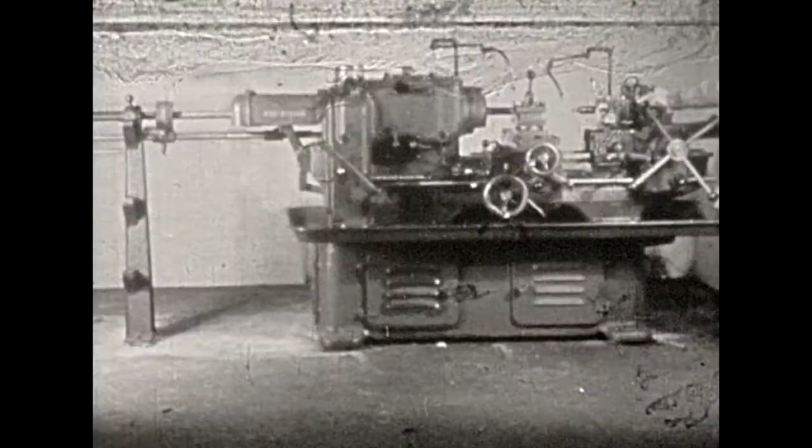The turret lathe is used when the same series of lathe operations is required to produce identical pieces. In the hexagon turret, 6 different tools can be mounted and used one after the other. Additional tools can be mounted on the cross slide. With this arrangement, any number of identical workpieces can be put through the same series of operations.

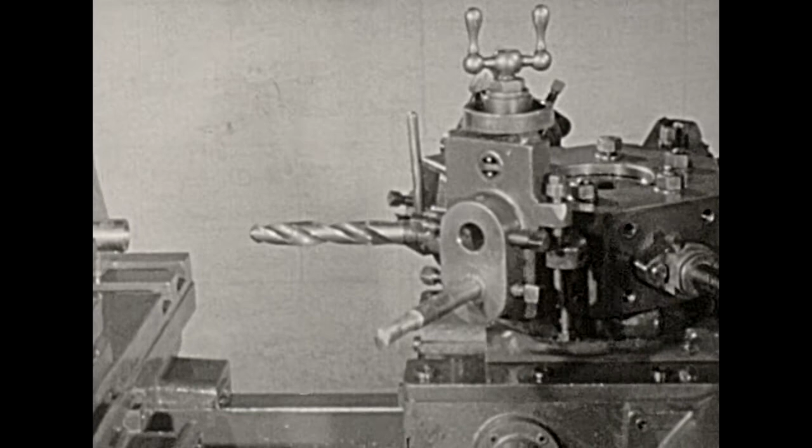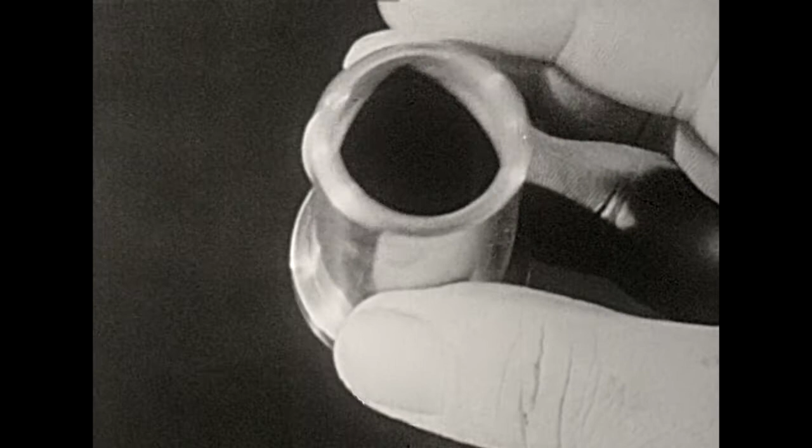This typical turret lathe job requires 10 individual operations to produce finished pieces from 1 1/2 inch bar stock. All the operations are made with one setup. The job to be done, the tools to be used, and their order are specified as follows.

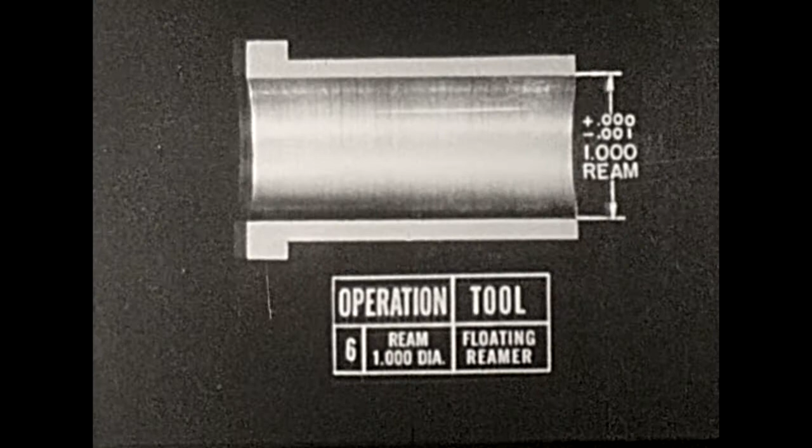The first of 6 operations with the hexagon turret, combination stop and center drill. 2, chamfer with a chamfer tool. 3, machine the outside diameter with a box tool. 4, drill a 31/32 hole. 5, bore to .994 diameter using a sliding tool holder. 6, ream to 1 inch diameter with a floating reamer.

On the cross slide, undercut with a grooving tool. Face and chamfer with a facing tool. Break corners with a file. Cut off with parting tool.

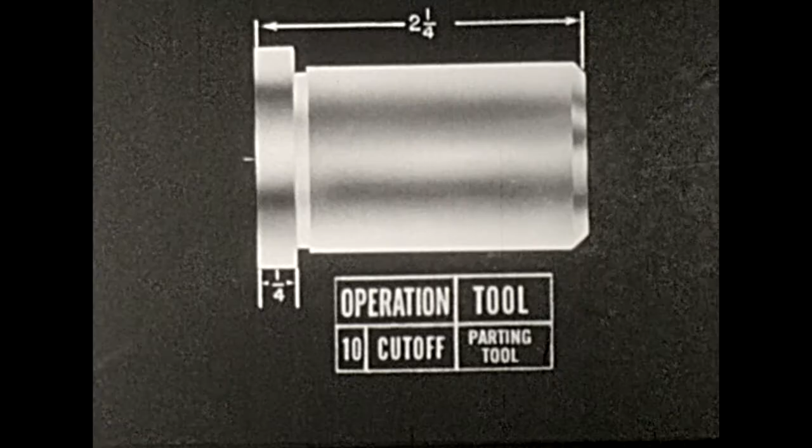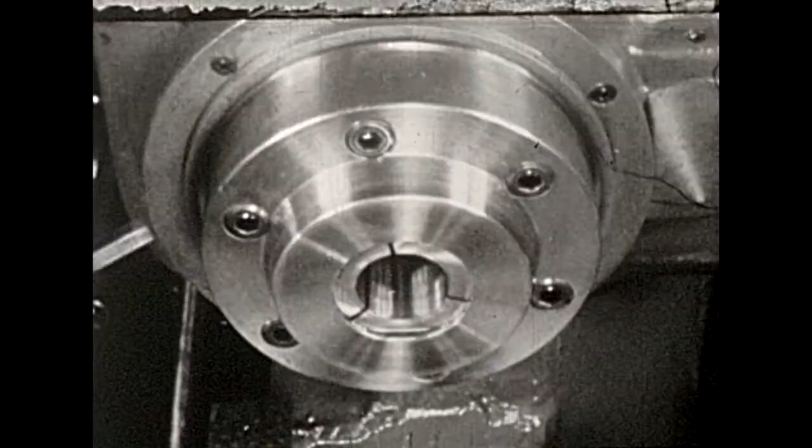To set up the machine to handle 1 1/2 bar stock, first remove the nose guard. Then the nose piece. The nose piece is removed so that the collet may be taken out and replaced by one for this particular job. Loosen the collet by tapping it with a lead hammer.

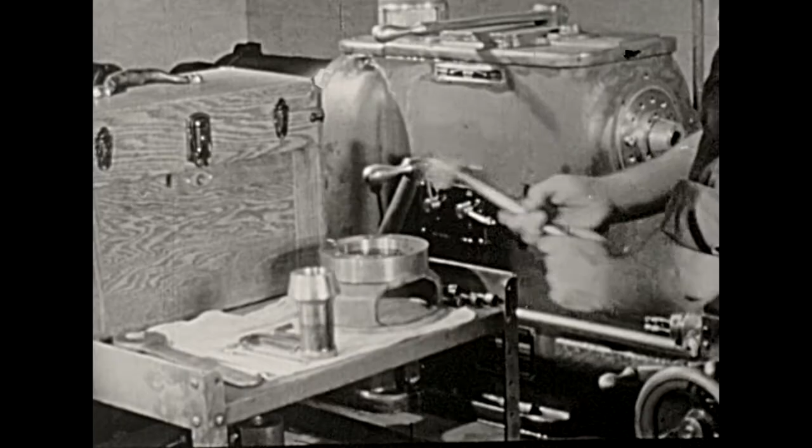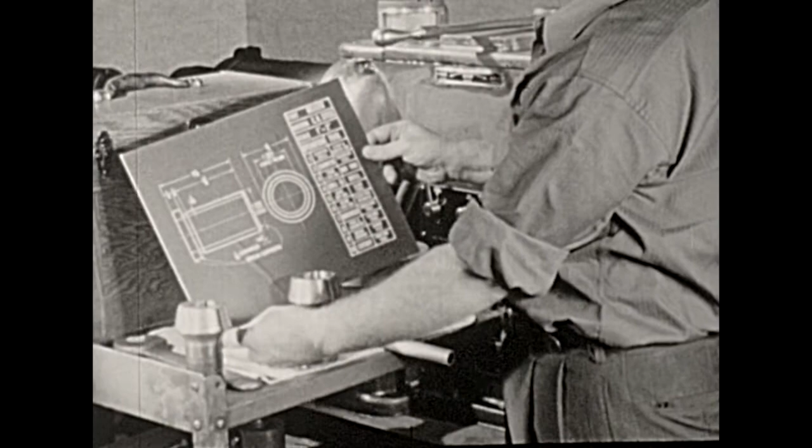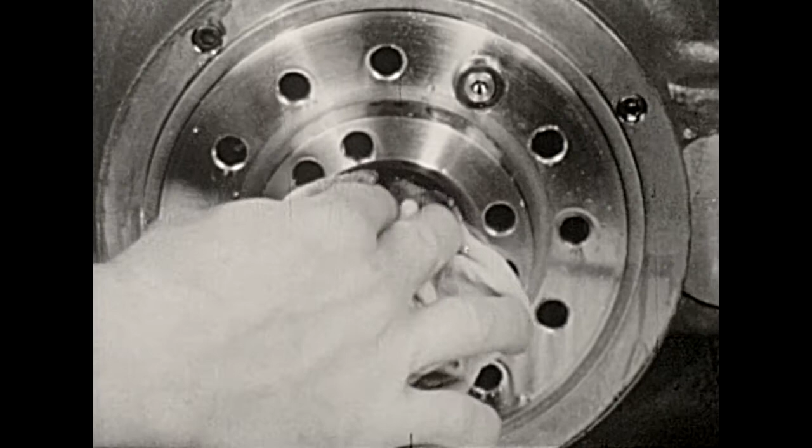The blueprint specifies the collet to be used. In this case, 1 1/2 inches. Before installing the new collet, be sure that the face of the spindle and other surfaces are wiped clean. Wipe the collet chuck. Place it on the spindle.

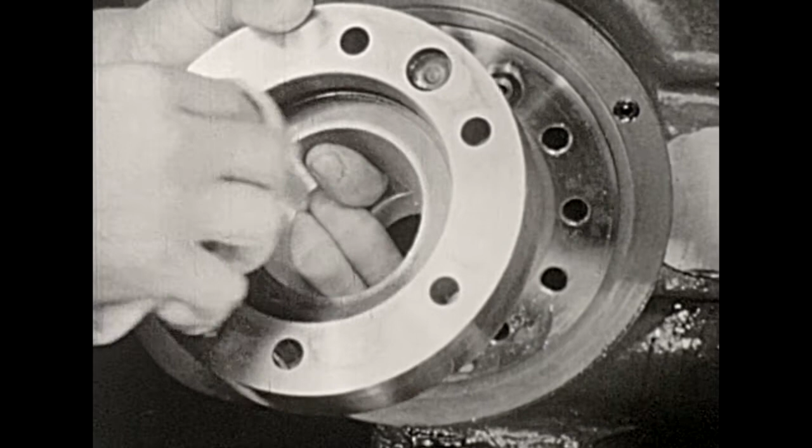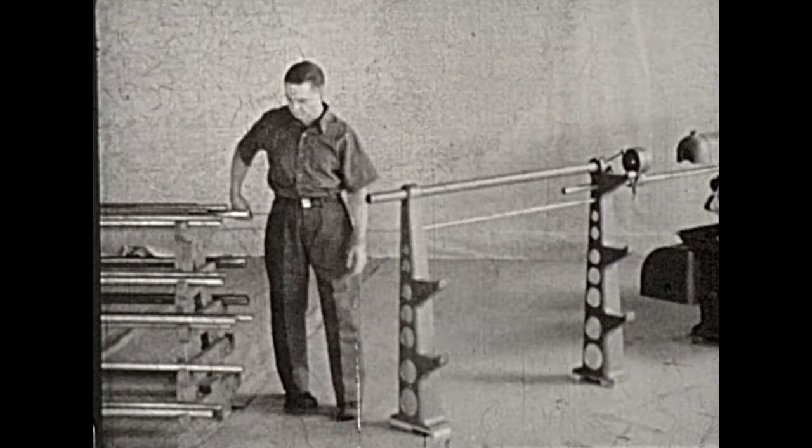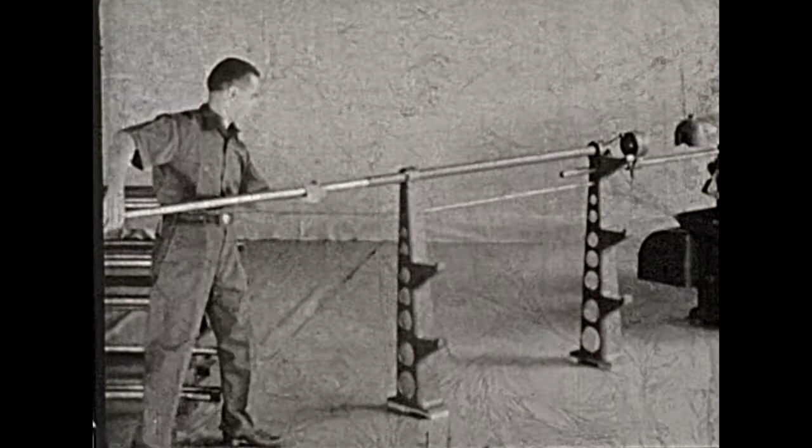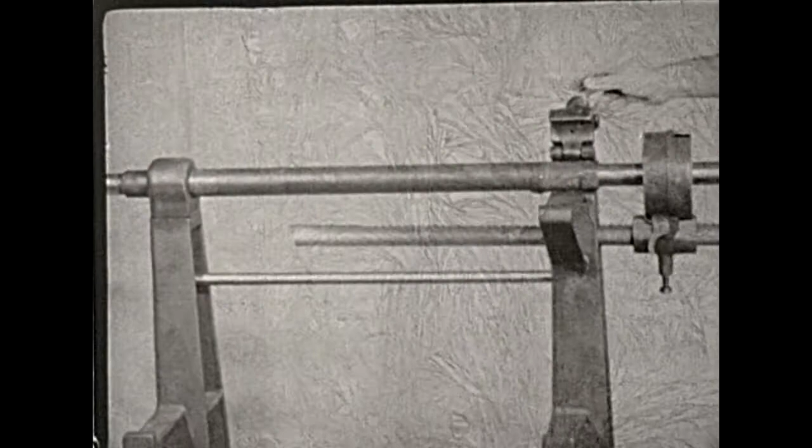Now reassemble the nose piece and nose guard. Select a bar of 1 1/2 inch cold rolled steel. Be sure to check it for size. Insert the rod into the safety tube at the rear of the machine. Push it through until it enters the spindle. Close and lock the clamp on the stock stand.

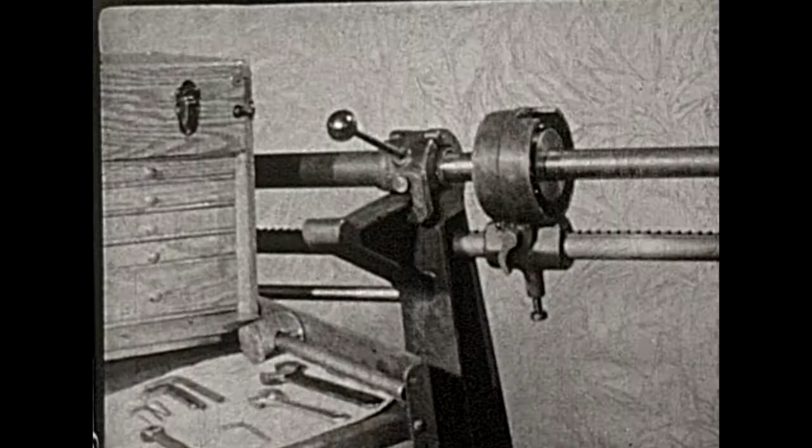Stock is fed into the machine by means of this feed collar and ratchet. Be sure that the set screws on the collar are tight. Also the lock nuts. The feed collar is operated by the bar stock feed lever. The forward stroke feeds the stock through the machine. In the rear position, the fingers are spread. This tightens the collet and clamps the stock in the spindle.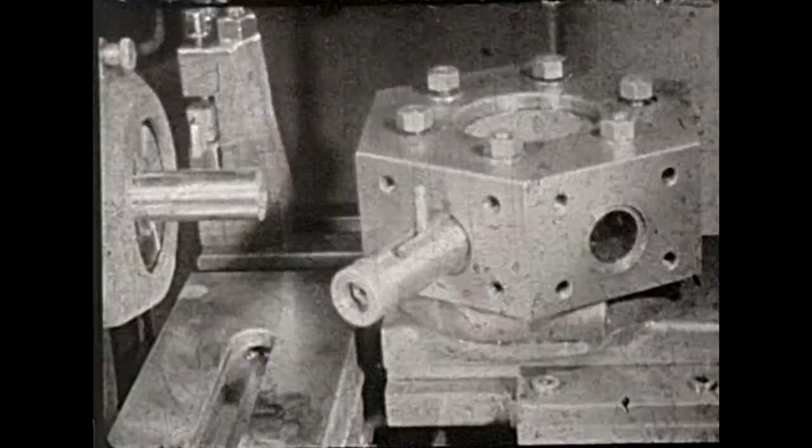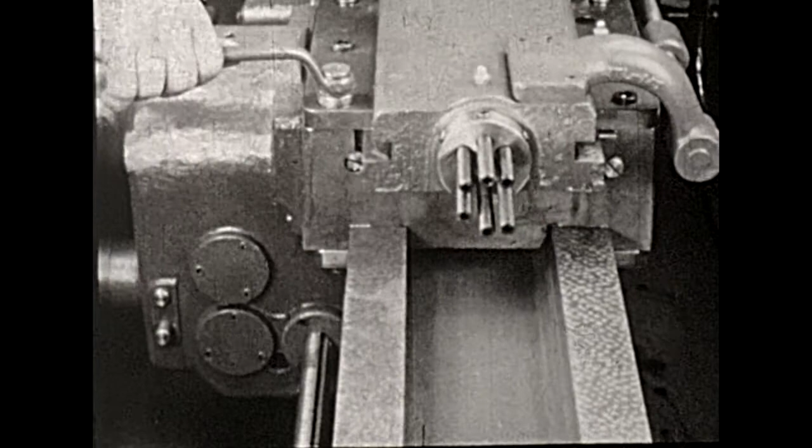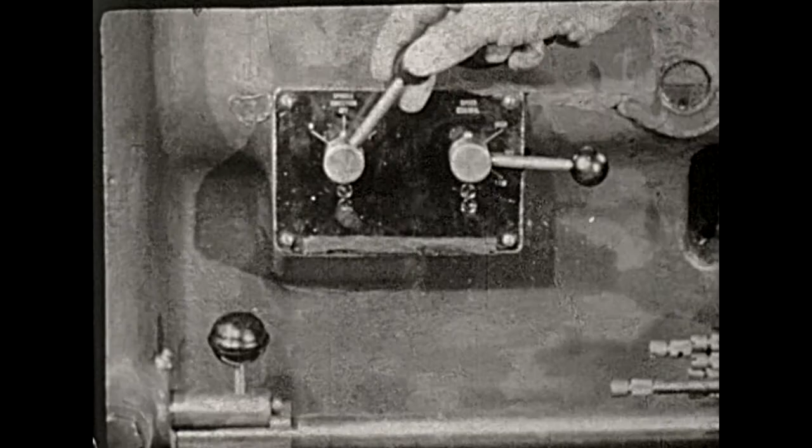Advance the stock stop until it is against the end of the work. Lock the turret ram. Adjust the stop screw for this turret station. The stock will always be fed out this distance. Tighten the set screw. Now back the ram to get ready for center drilling. Start the motor and set switch to forward position. When the clutch is engaged, the work will rotate in a counterclockwise direction. Spot the end of the stock with the drill.

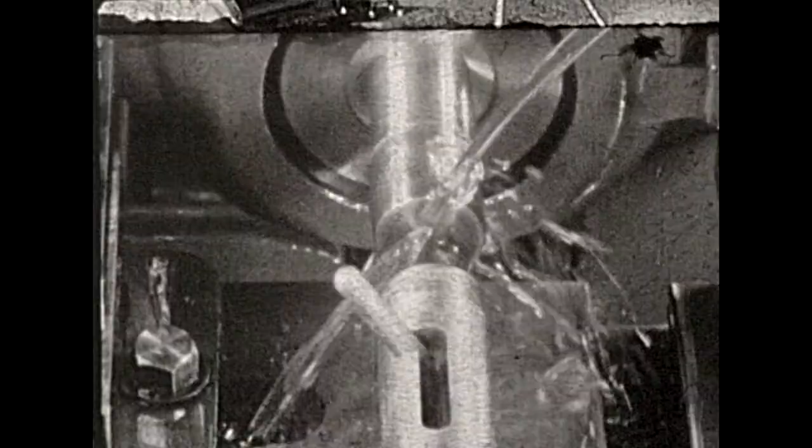The next operation is to cut a starting chamfer for the box tool which is to follow. Rotate the turret to install the chamfering tool. Stop the spindle. Attach the flange tool holder to station 2 of the turret. Tap it against the turret face with a lead hammer. The pilot holds it in place. Then mount the chamfer tool in the holder.

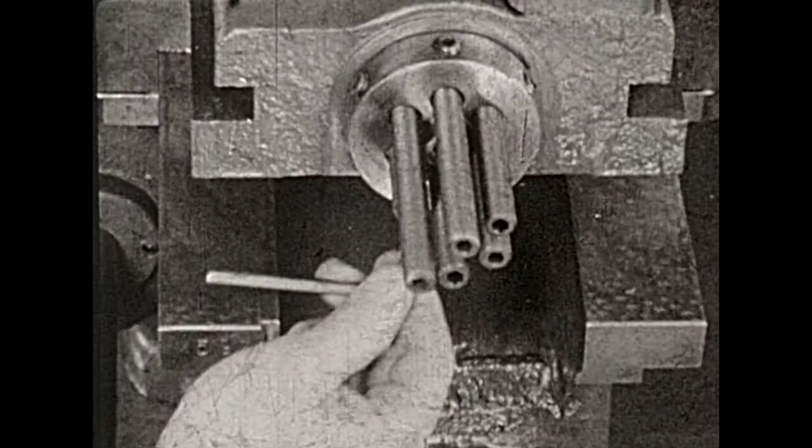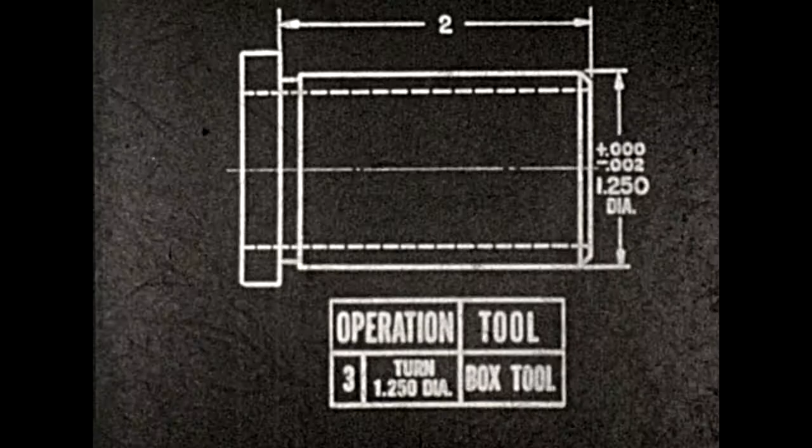Start the spindle, index the turret, and advance the chamfering tool into the work. When the cut is completed, lock the turret ram and adjust the stop screw for station 2. Rotate the turret into a convenient position to set up the next tool. A box turning tool is attached to station 3 of the hexagon turret. This is also called a roller turning tool.

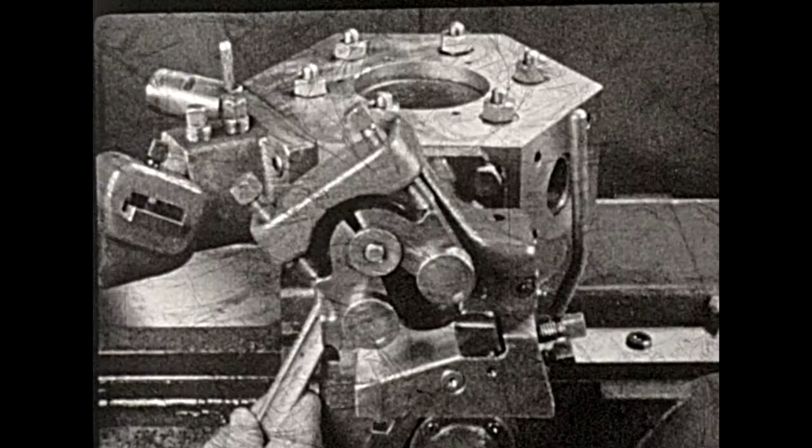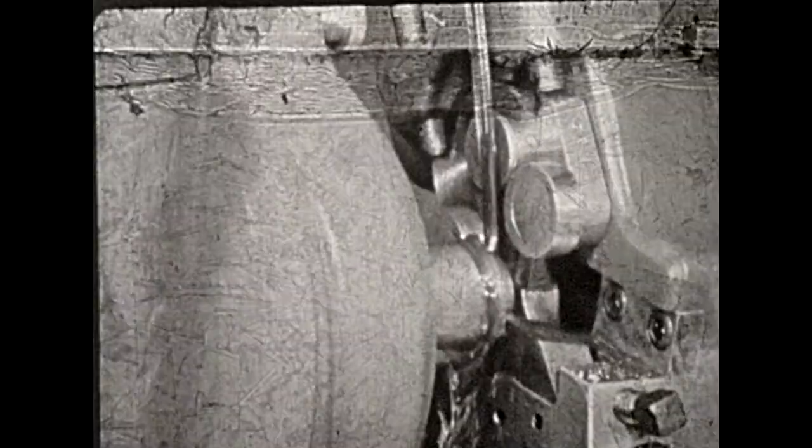Index the turret to put the tool into cutting position. Set the speed by lowering the speed control lever and holding it until the correct speed is registered. Start the spindle and make a trial cut. To check the diameter, stop the spindle.

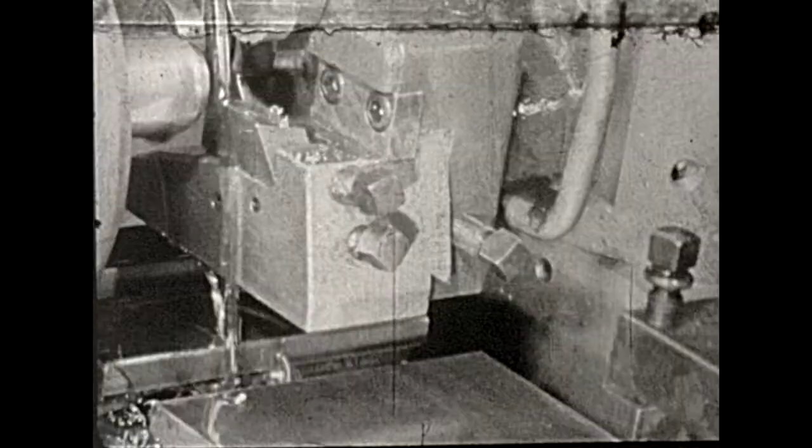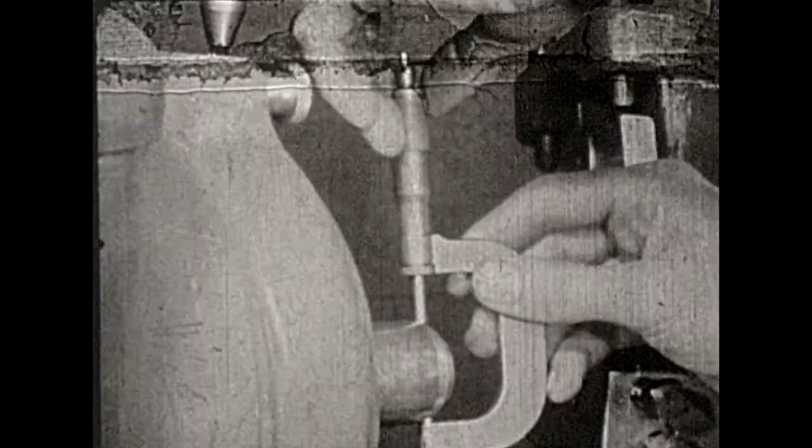Here, the tool must be adjusted to remove an additional 30 thousandths from the work. Turning the adjusting screw moves the cutting edge in towards the center. Take another trial cut and check again. The new reading, 1 inch and 250 thousandths, is correct.

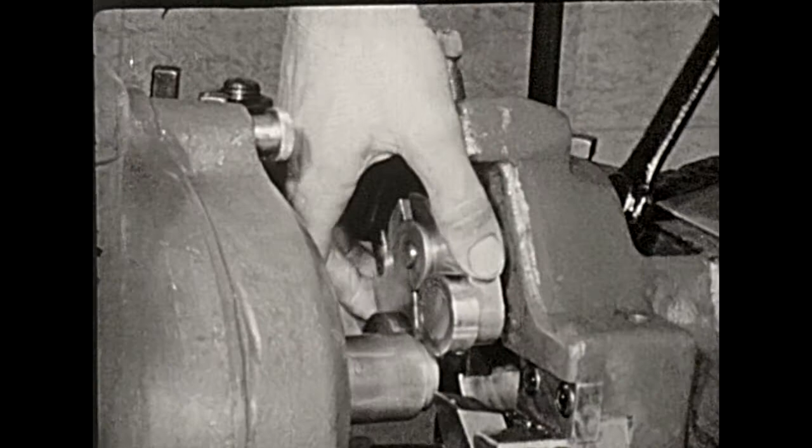The stock is held to the cutting tool by the 2 guide rollers. To adjust the rollers to the work, turn the lock screw. Finger pressure against the rollers will just stop them from turning with the work. The cut can now be completed.

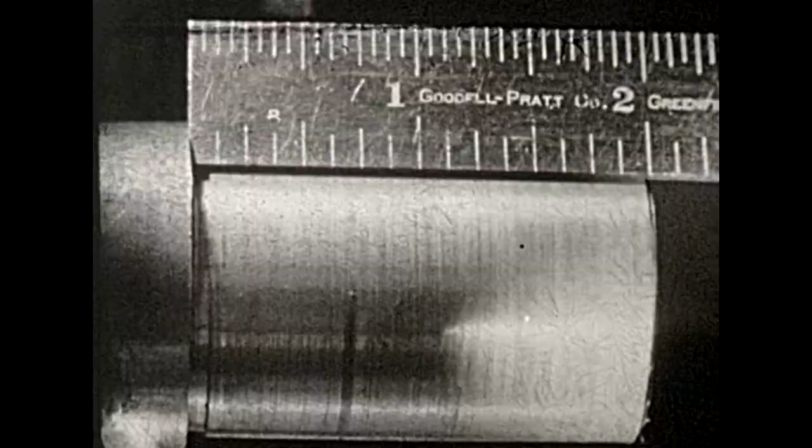Throw out the power feed. The cut measures 2 inches as specified by the blueprint. Now advance the tool to the full depth of the cut and set the stop on station 3 of the turret rack.

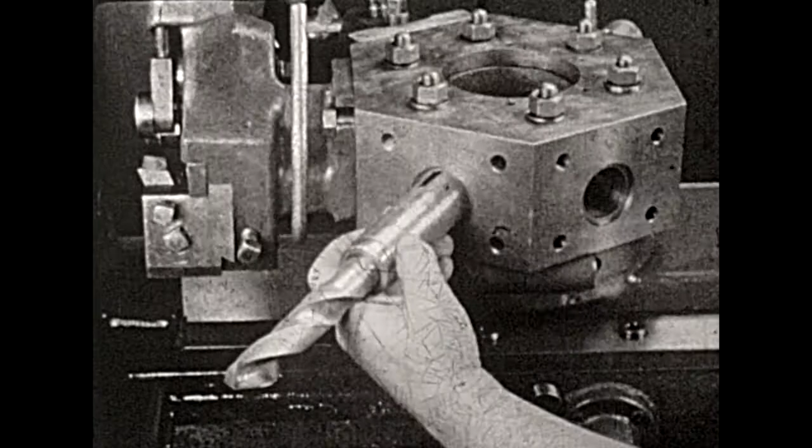Set up on turret station 4 for the drilling operation. A 31/32-inch hole is to be drilled. A sleeve is used in mounting the taper shank drill. Be sure the clamp nut is tight.

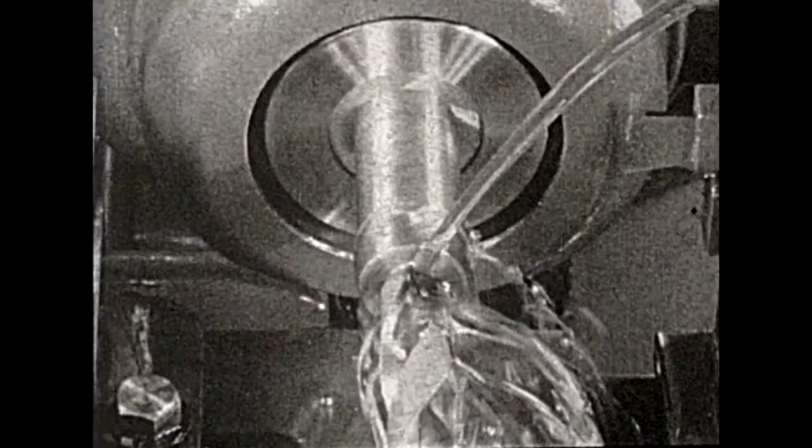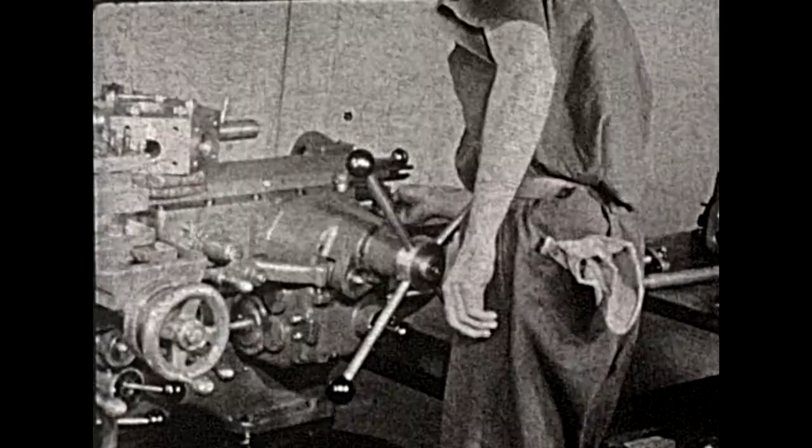Index the turret and feed the drill to the work by hand. Power feed is used here also. Use plenty of coolant. Measure to be sure the depth is 2.5 inches as specified. Now advance the drill to the full depth of the cut and adjust the ram stop for the drilling operation.

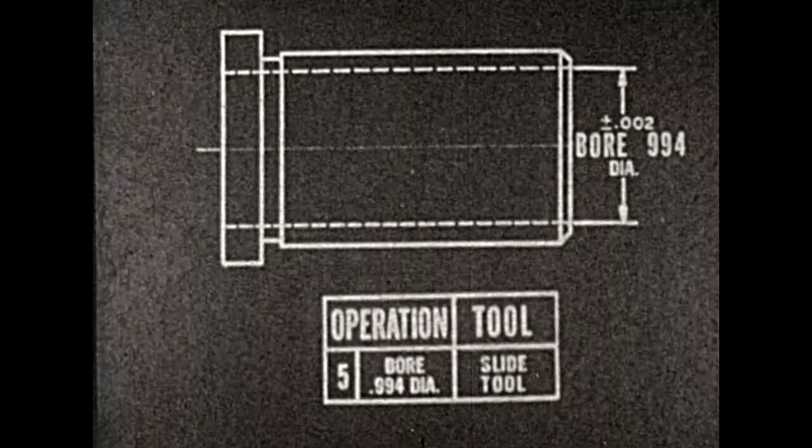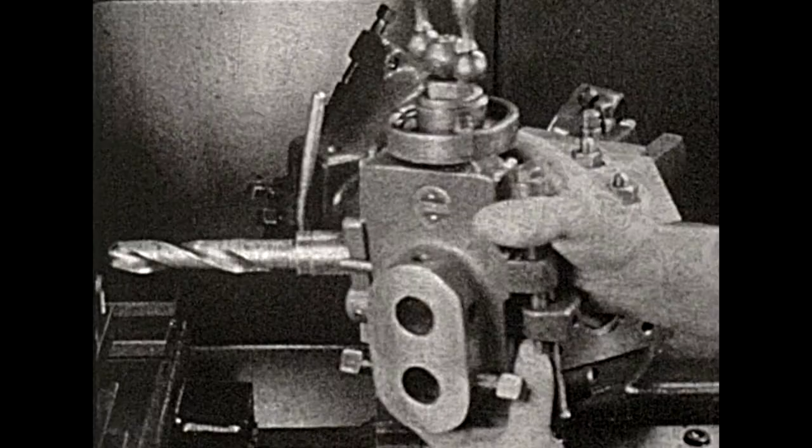Operation number 5 is to true up the hole to 994 thousandths diameter. A sliding tool holder will hold a boring tool. Attach the sliding tool holder to station number 5 on the hexagon turret. Place a bushing in the holder and insert the boring tool with the cutting edge up. Tighten the clamping screws on both sides with an end wrench.

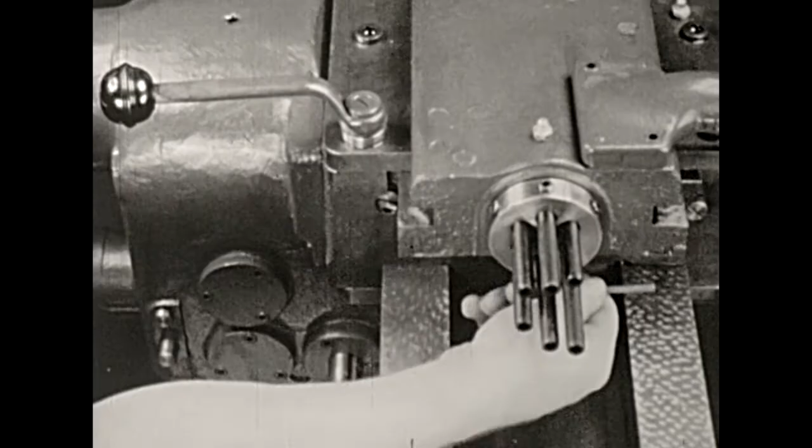Index the turret to line up the boring tool with the work and advance the tool to the full depth of the cut. Set the ram stop screw. Since the depth to be bored can be determined before starting the operation, the stop screw can be set before starting the cut. Withdraw the boring tool and set the feed. Rotating the hand wheel raises or lowers the boring tool.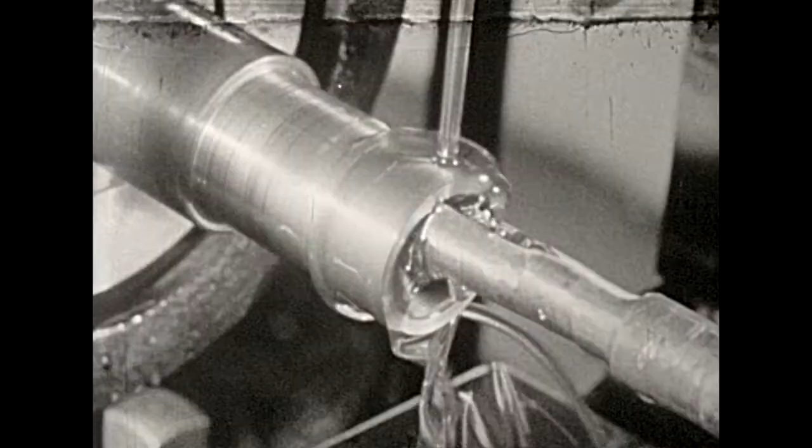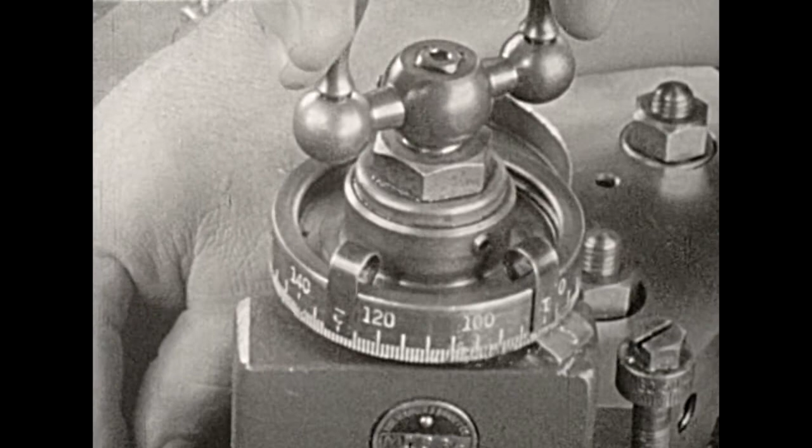Make a trial cut. Check with a plug gauge. The hole is undersized and the depth of the cut must be increased. When the size is correct, place a clip on the dial to mark the setting.

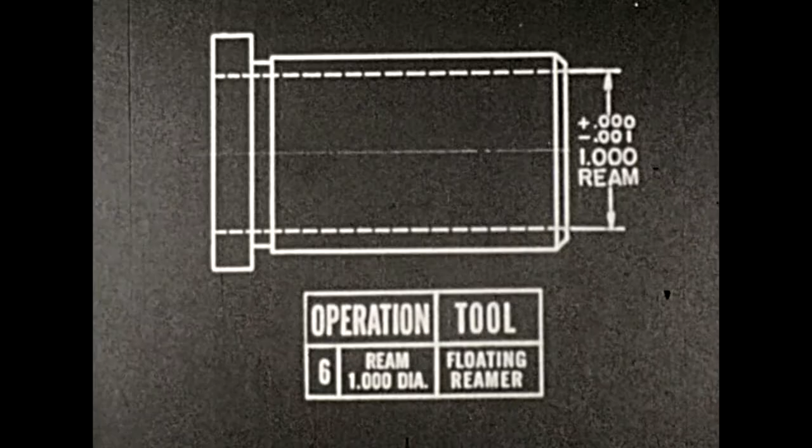The hole must now be reamed to the 1-inch diameter. The tool to be used is a 1-inch reamer. First install the sleeve in the turret, then the reamer, which is equipped with a floating holder. Turn down the nut by hand, then tighten.

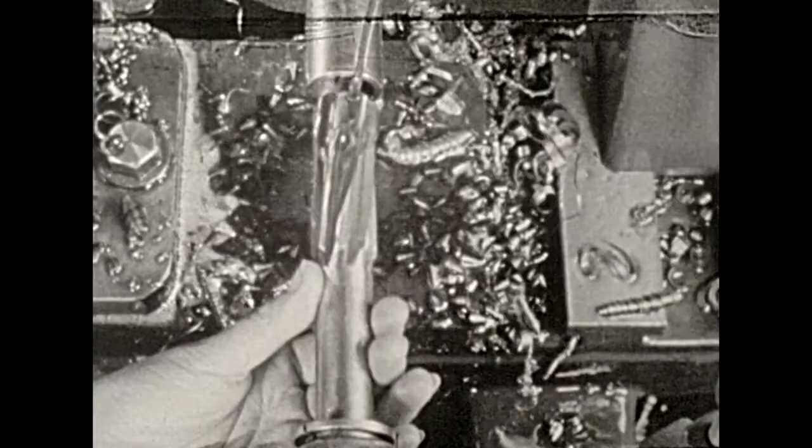A very slow speed is required for the reaming operation. Set the machine to the lowest speed. Start the spindle and guide the floating reamer into the hole. Feed the reamer in by hand to the full depth of the hole. Check the diameter of the hole with a plug gauge.

Set the ram stop for this operation. This completes the setup of the turret. The remaining operations will be done with a cross slide. The next operation, making the undercut, is done with a grooving tool.